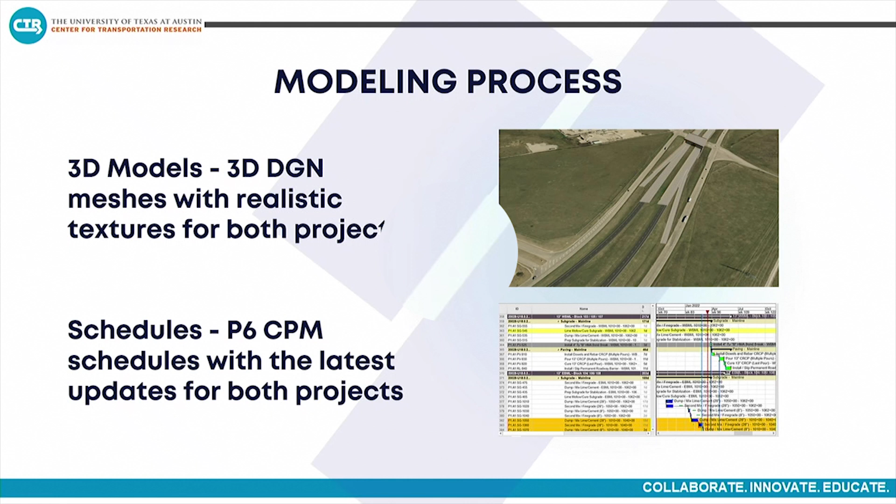Now the modeling process: first we obtain a 3D model by getting horizontal, vertical, and cross sections from the design team, and then we added the texture in 3ds Max.

Then we proceed with the so-called resource generation. That's a way to organize the 3D objects that are imported in order to generate groups that will be assigned to different tasks in the next step.

So for the schedule import, we imported from P6, and we set the scenarios because we obtained two different schedules that belong to two different updates. And we perform the task assignment, matching the 3D objects that belong to the resource with the actual activities.

And then for the 4D modeling, we perform a little bit of animation in just a piece of equipment and some parts of the project, like objects, beams, slabs, in order to show a construction sequence. I'm going to show a video about that next.

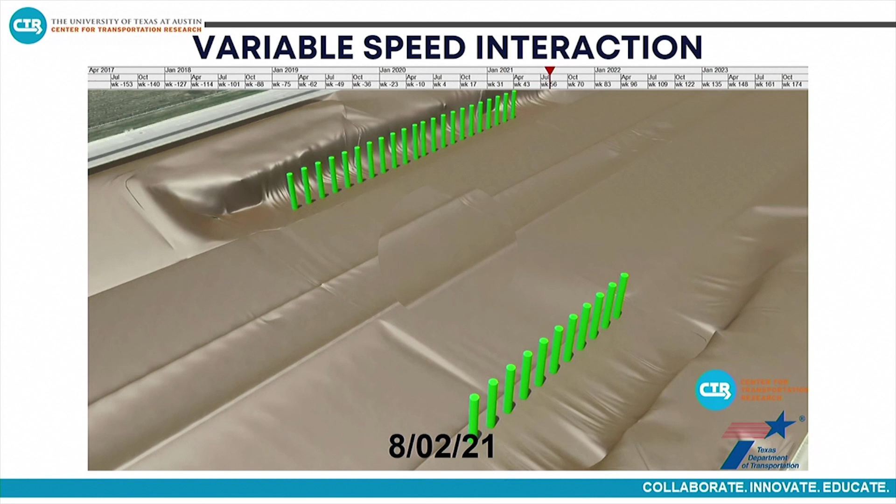So this is the first animation we obtained. That's a variable speed interaction that allows us to watch the construction sequence. It includes a detailed bridge construction sequence. We use different speed animations in order to show detailed activities such as beam placement, retaining walls, bridge construction, and also road construction.

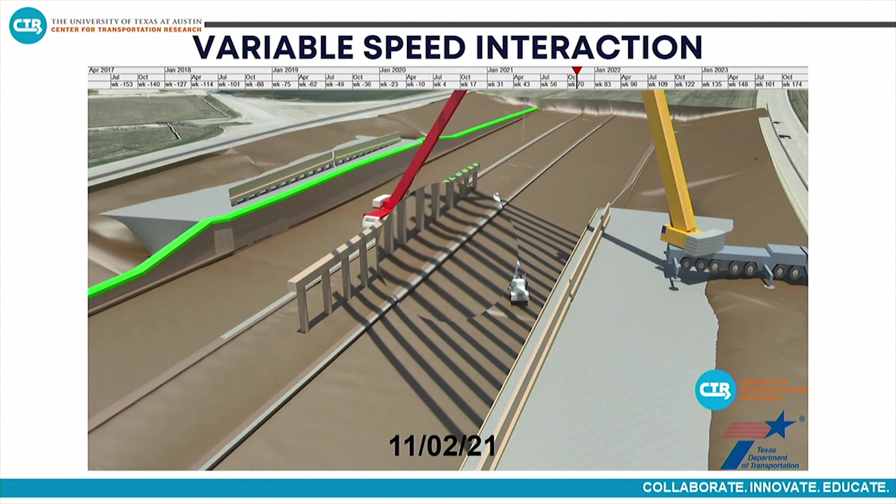All those components have detailed textures and added surroundings, so we were able to add some filling material behind the retaining walls, and also we were able to animate cranes and show a little bit of detailed construction in the middle of a big project construction or interaction.

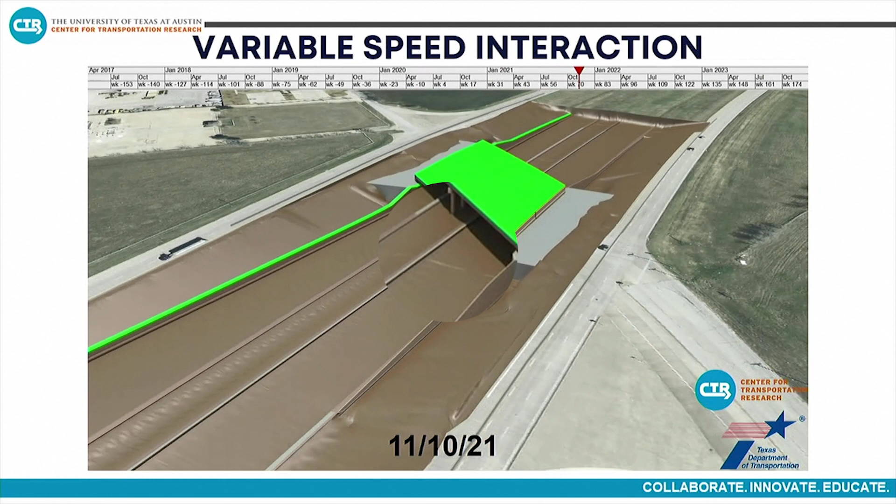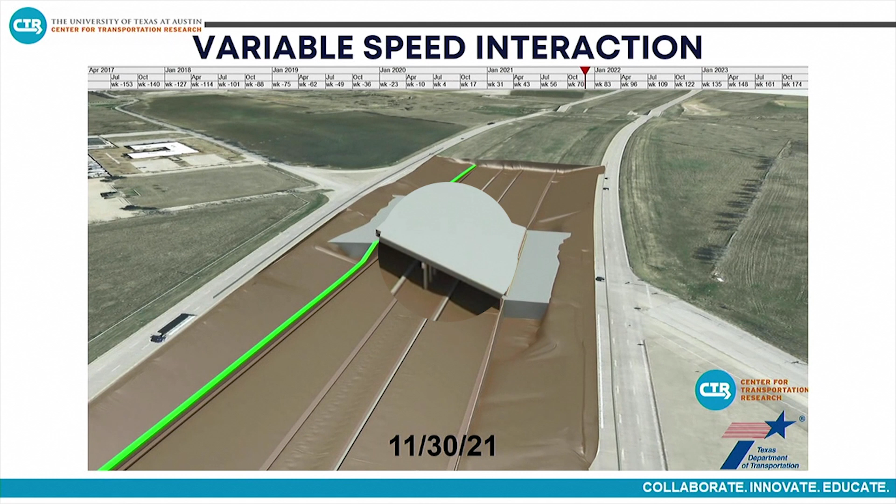We were able to switch between cameras, trying to show the pieces that are being constructed on screen. Now we are going to notice a difference between this animation and the next one that I'm going to show now.

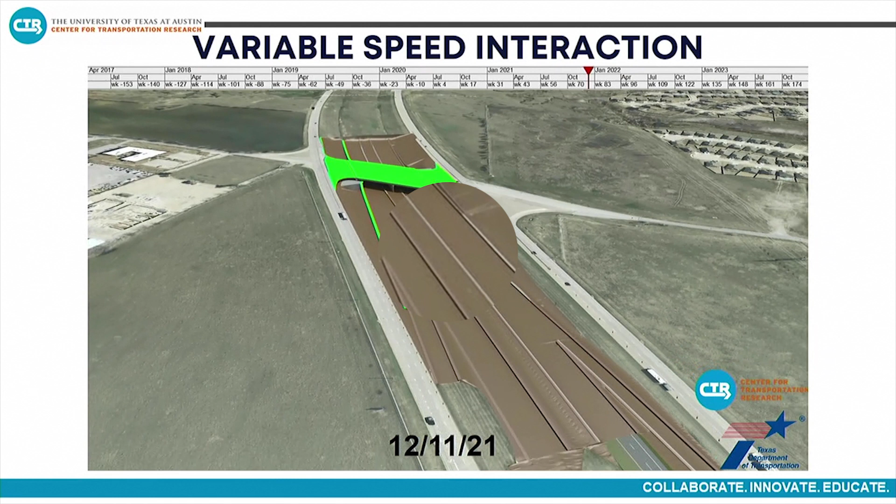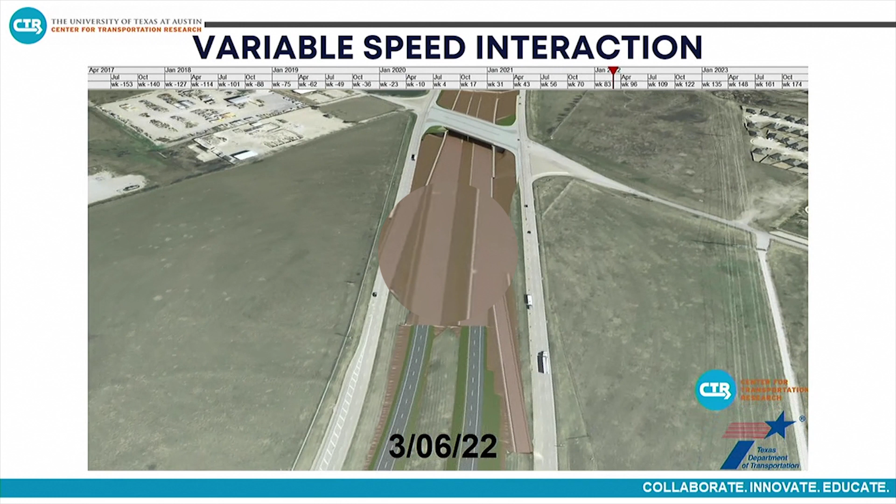So after the bridge is finished, the road construction continues, and you can spot several layers, like the construction sequence for both connectors. NT3C is on the bottom, and the SH170 parts on the top. Now it's pavement layers,

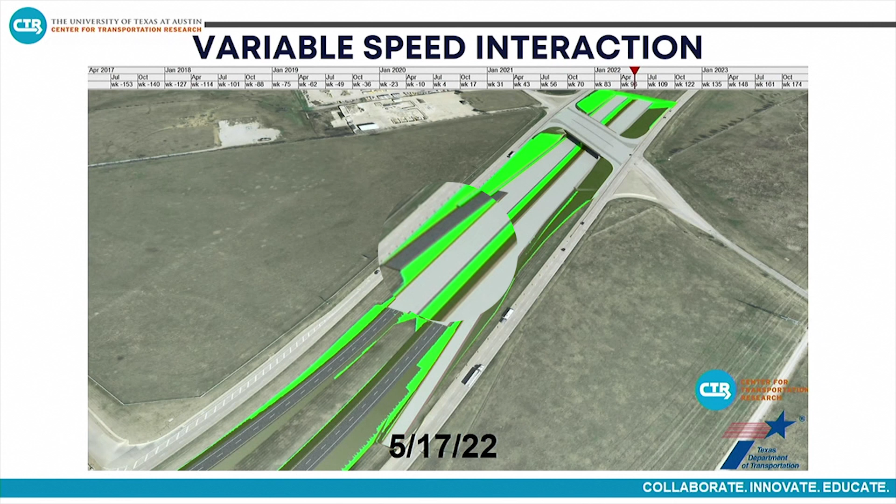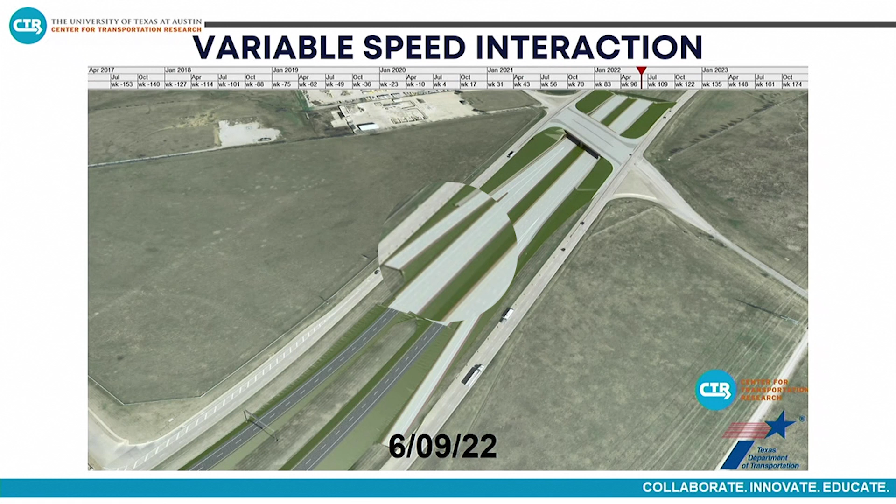and finally the concrete pouring for the pavement. So that's the final frame for this model. This is just a general 4D model that shows the sequence, and we included temporary roadblocks and safety components in order to add more context to the animation.

Now this is the second interaction we exported, rendered. This is a dual view interaction. In this video, we can monitor different views of the same project, so we can follow SH170 activities on the right side of the screen and NTE3C activities on the left. Both are running the same schedule.

Road projects can have a long footprint, so if you use a single camera, you can't spot what's going on at the other side of the project. So you can have this kind of multi-camera, multi-view running the schedule at the same time. This was exported from Synchro 4D at the same time. We didn't add different cameras in the video editor or a different program. It's just a direct render.

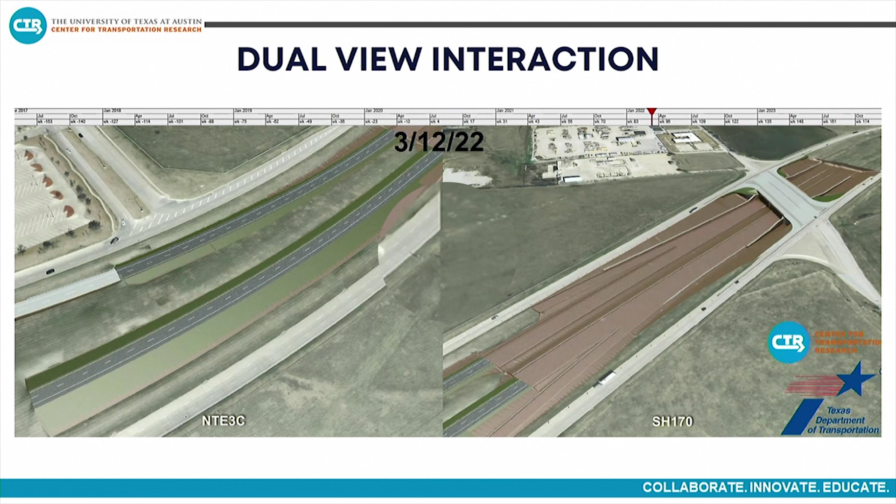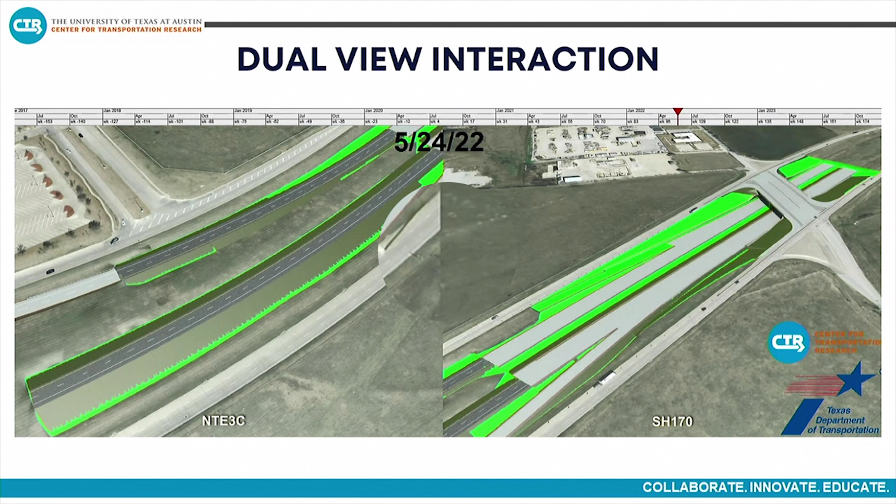As to recap, animations can focus on different parts of the project and run the schedule at the same time. You can get detailed visuals for specific parts of the project. Sometimes there's the big road, but there are certain pieces of infrastructure in the middle that you can put some kind of attention on and watch them being built at the same time.

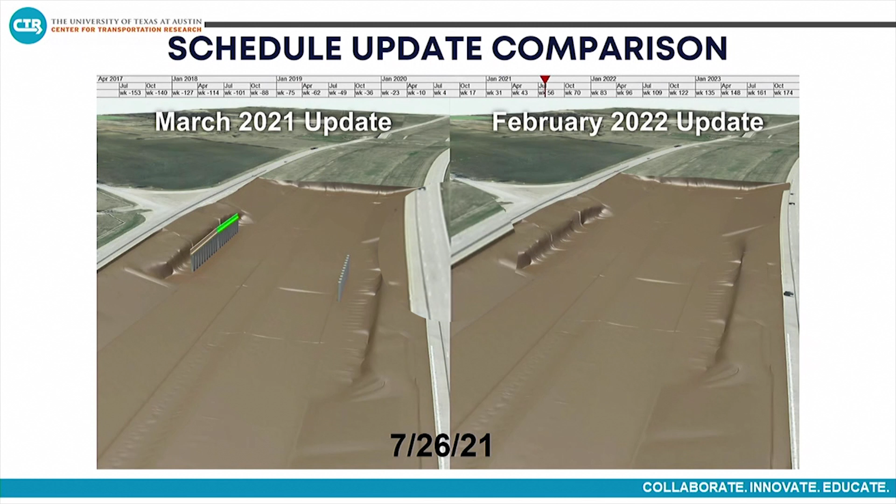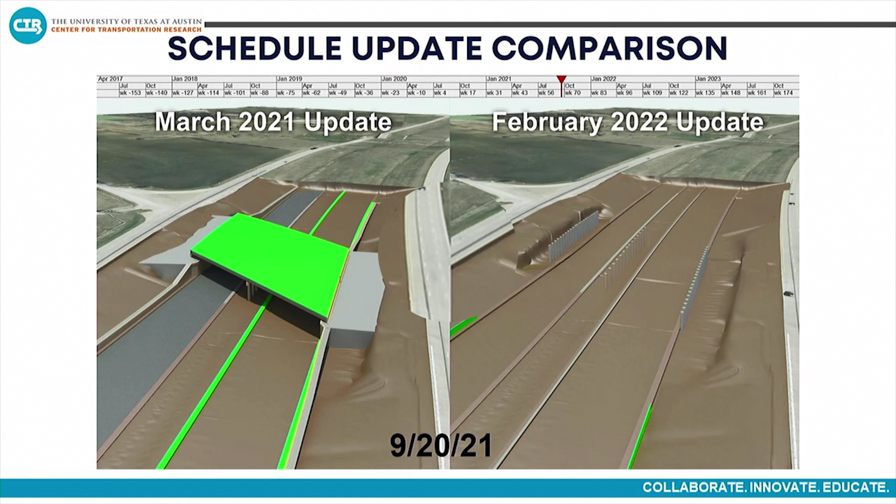Then finally, the third animation, the schedule update comparison. We are running two schedules at the same time in the program in order to be able to spot delayed activities and when they start. The important thing about this is that we can spot changes between the schedules visually. So we can notice that on the left side, like bridges, it's been built, but in the next update, those activities are delayed.

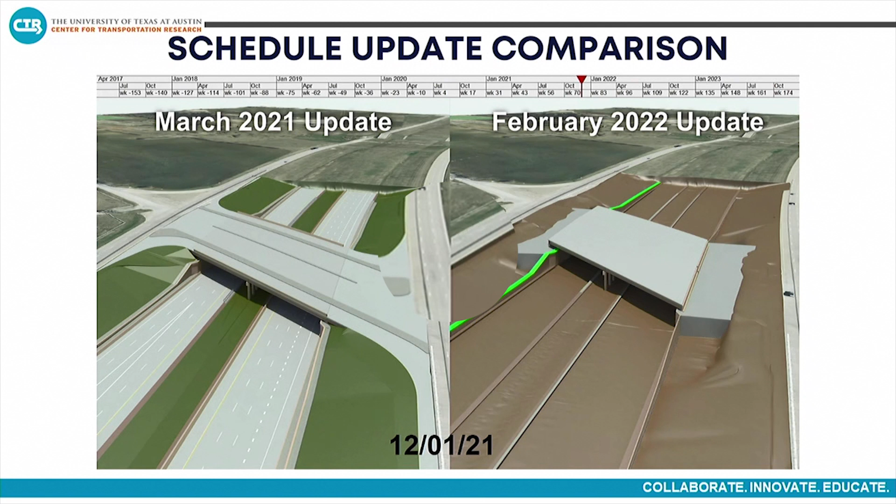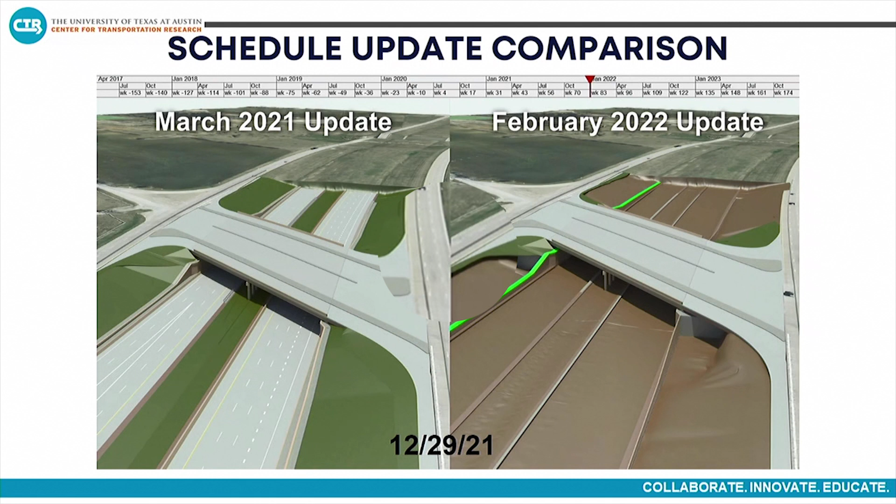We can spot too that the construction sequence changes, especially in the road construction sequence. That could be spotted visually too, instead of trying to read a complex schedule. Sometimes you can spot that visually. That makes it easier for the management team.

Or sometimes you have too many activities, like more than 1,000 activities, and then you can run a program in order to spot which changes have been done to the schedule in the next update. But because there are too many activities, it's hard to know if that will impact the construction sequence in a certain way. So this could help the project management team spot those activities.

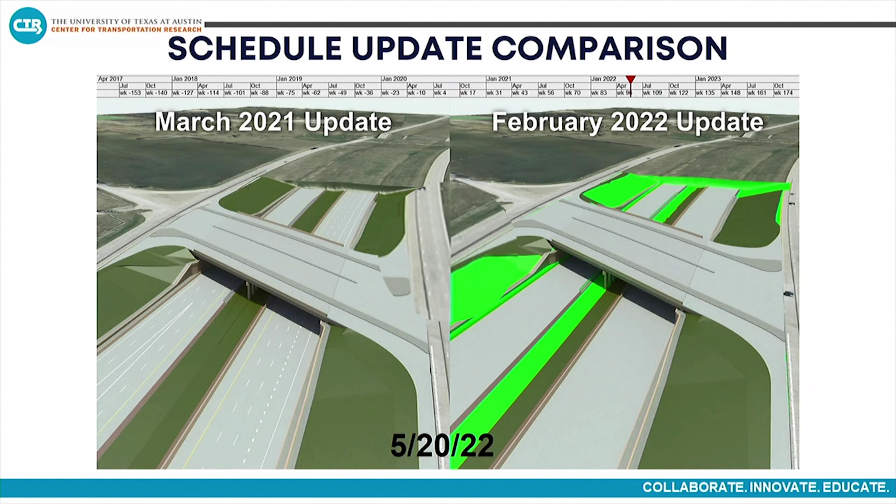So this is just a recap. But the important part is that users can spot earlier started and delayed activities visually, trying to be a visual help while comparing schedules.

So this is just a small feature compilation. You can get construction sequence, multi-view, schedule updates, and a variable timeline. Sometimes there are long activities and really short activities, like the bridge construction takes near a month, but the whole project is more than a year. So you can change and alter the timeline scale for certain parts that you're interested in or that you want to see.

Then we can add camera movements and 3D object animations, like cranes, and objects that grow or disappear between the activities. Also, there are modeling features like temporary signs. You can add temporary facilities or parts of the job site that then disappear after the project ends. Then you can add equipment, materials, excavation fill, and add realistic textures.

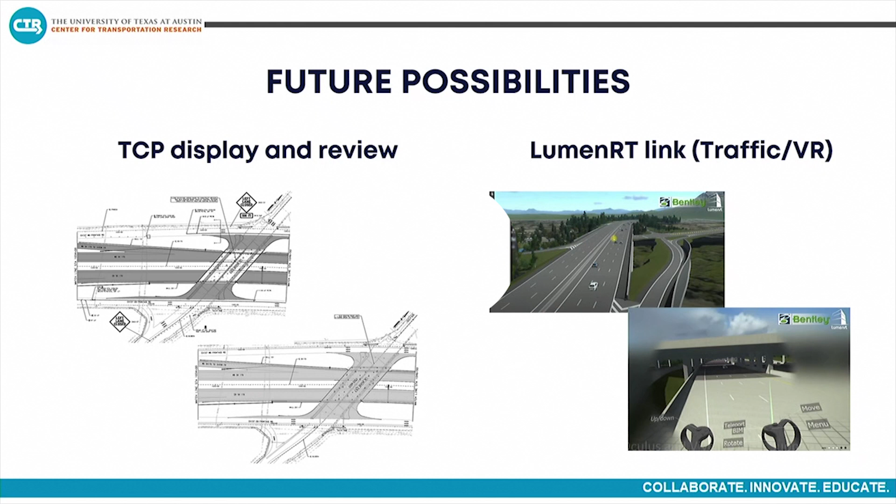Our second plan is to move the 4D models into LumenRT and get a VR interaction with the 4D model using a headset and watching the construction in real scale. So these are the two applications of 4D that we're planning to perform in the future. And that's it. Thank you.